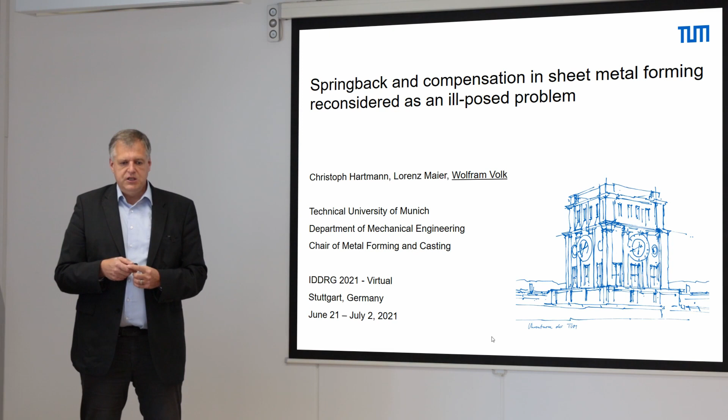When we have a look at Springback, we know it's a big issue. Most dimensional problems caused in sheet metal forming mainly depend on the Springback behavior, and there we have the stress distribution as the causing effect. We know we have contact forces, elastic plastic behavior, and after releasing the contact forces, we have the deformation of Springback. So we have many influencing factors.

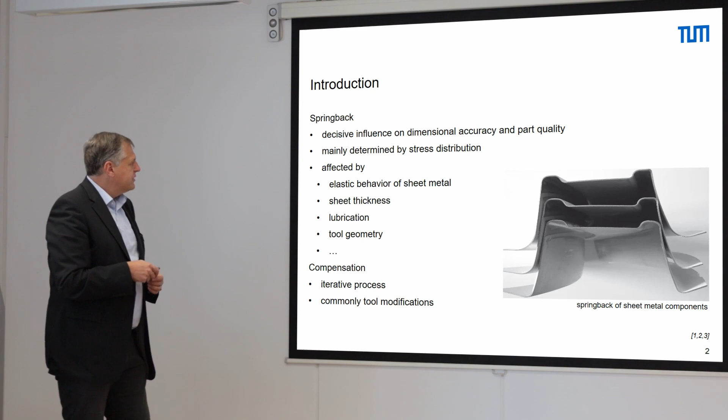It's definitely the elastic behavior of the sheet metal, especially for the unloading, and then the sheet thickness, lubrication, tool geometry, and many more.

Compensation nowadays is an accepted strategy to overcome these dimensional problems, and it's typically done in an engineering iterative process, ending in tool modifications.

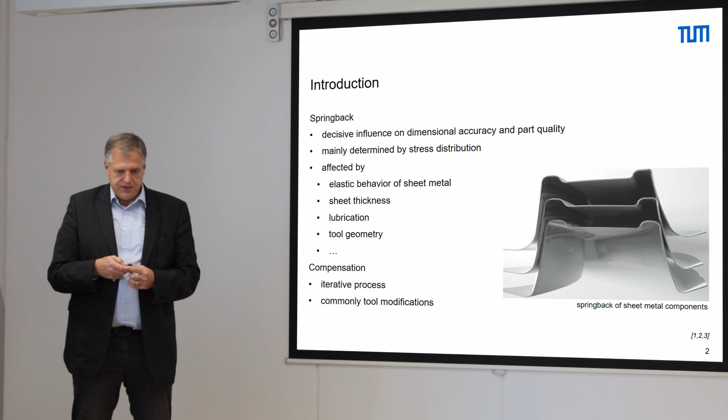Now when we see the classical approach, the question we have to answer is how to design a tool and process to achieve minimum deviations between the target and the component geometry after Springback, with respect to given process restrictions. So this task is written down, and typically we have 3 basic steps until we can come to these modifications.

First of all, we need the stress state after the forming process when we have closed tools. This is not a big thing in most simulation tools within a given accuracy.

Then the next step, also well established in our simulation packages, is to calculate the Springback when releasing the stress for closed tools.

Here we see a quite difficult example of a typical industrial part where we see typical deviations up to 7 millimeters in the corner areas. The Springback is in the direction where we don't want to go within our tools. Of course, our tool must go in the opposite direction, and therefore we need measurement and a compensation strategy.

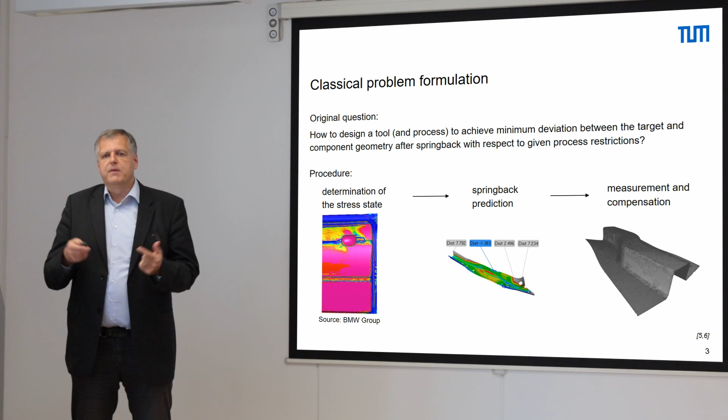So here we transfer this strategy from the last slide into a mathematical description, where we see the desired tool and die geometry. Then we have the measured geometry G, depending on the tool geometry and process parameters, and we have the CAD geometry or target geometry. So here we can measure a deviation between the desired and the current geometry.

In addition, like in nonlinear optimization, we can use restrictions. These restrictions can be inequality or equality constraints, and a typical inequality constraint is undercut. Our tools must prevent undercut, because otherwise it would be impossible to form it.

So undercut would be part of these inequality constraints, and also sometimes we have limitations within our tool realization, like the punch opening line, which is given, or that it's not allowed to change the blank holder geometry. These can also be defined as equality constraints. So this is our mathematical representation of this classical engineering approach.

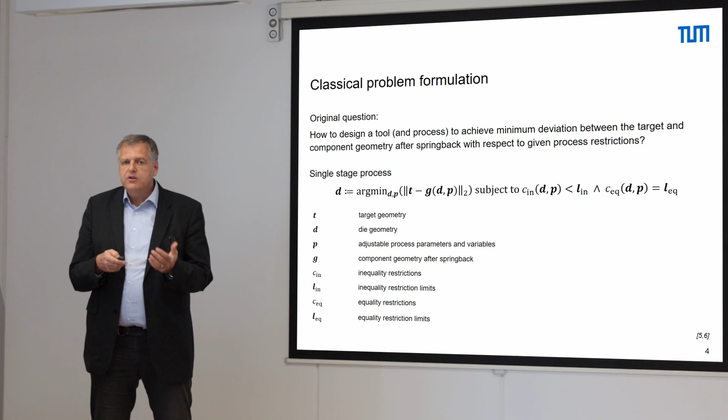Here we only have one forming operation. When we have a look at industrial applications, we not only have one stage. As you can see here, we have for most automotive applications multi-stage processes.

So where we have the first forming operation, we have cutting, restrike, calibration, and so on. Here we also have an important forming content in the first one, but also in the other stages, where we can have forming parts and therefore also Springback.

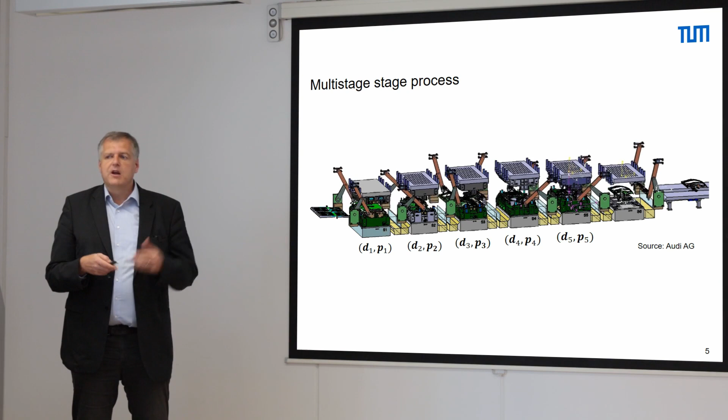And now the question: how to formulate these real processes, multi-stage, in the same mathematical framework as presented one slide before. When we go on here, we say, okay, we can enhance our formulation.

What's our customers asking for? Our customers are asking for a final part within the given tolerance. That means when n is the maximum number, we have to minimize the deviation in the last forming stage. But we don't know how to do it, because the other forming operations are also influencing the final result. So here it's just the mathematical representation.

Okay, the final part must be within the tolerance, and we can have inequality and equality constraints for every stage.

Okay, so here it's written down easily, but how to overcome this problem? We want to highlight this with our example. That means even when we start here, this is our target function, and here we have the influencing geometries of all the intermediate stages.

When I had my industrial time before academics, we also had many discussions how to do this. At this time I said, what would be the case when we demand that the deviations in every stage should be minimized? Then we have not the full degrees of freedom, so we have additional constraints based on experience that we say, okay, when the deviations are not too big, we have the option to minimize them within a suitable time.

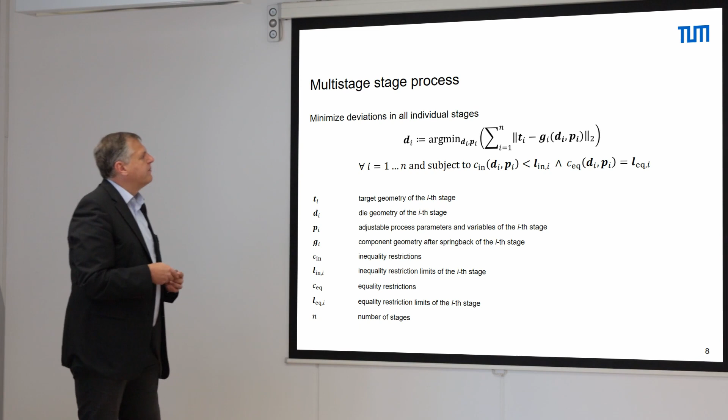This can also be written down in a mathematical framework, that we minimize the deviation in all individual stages. We have the sum of all the deviations, and they are not independent from each other. We have to start with the first one, and the second one is depending on the first, and they go ahead within our different stages. That means we minimize the first one, the result of that is the incoming geometry of the second one, minimize this, then minimize the third, the fourth, and finally the fifth one.

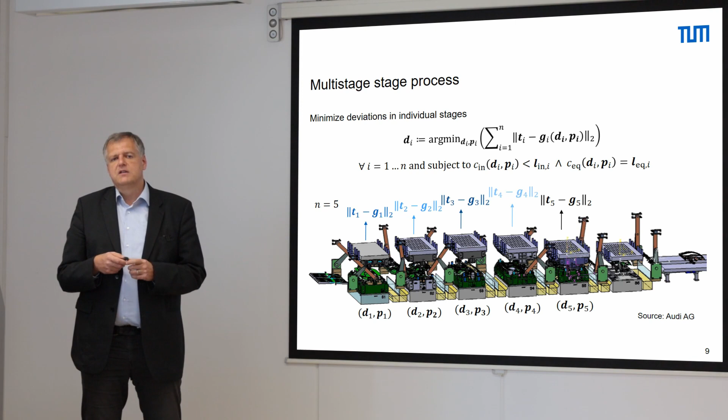So this is also a suitable strategy, but it's implicitly part of when we just minimize the final one, but we have the demand of more constraints within the prior geometries. That means at the end, typically with this strategy, we are maximum as good as when we just do it in the last one, but because we are losing some degrees of freedom, in general we will be not as good as when not having these constraints. We will see this also later in the short example.

Okay, now we can say, let's go on. We have a description, we can go for a solution because now it's a mathematical equation. Then we can have a look in math books, find strategies how to solve it. But then normally the prerequisite of a well-posed problem occurs. That means, okay, perhaps it can work, or perhaps it cannot work. Therefore, we should consider first the structure and the basic limits of our formulation. What's part of the so-called well-posed problem?

When we have a well-posed problem, we go back to Hadamard's work. We should, or we must, ensure a priori that the solution exists. Also, the solution must be unique and it must be robust. That means, in the mathematical description, the behavior of the solution changes continuously with the initial boundary values. In engineering words, small changes in the incoming variables should also lead to small changes in the output result and not a chaotic behavior.

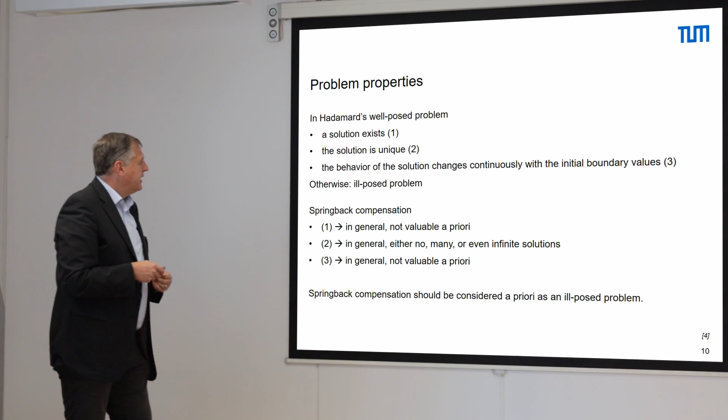Also, especially for the multi-stage problem, there can be different ways for the same geometry, so the solution of tool geometry where we're looking for is not unique. And finally, also the robustness is not always fulfilled. So from this point of view, our problem is in many cases ill-posed, and so it's not a wonder that sometimes an established solution strategy, which comes to a result for one example, fails for another one.

Okay, so let's transfer this problem to sports. When we are a manager of a football team and we know we have an ill player, what can we do? First, we can send him onto the field, hope that the illness is not too bad and we will have success also with the ill player. But on the other hand, we have the option to give him medicine, so that he will recover and then have full strength afterwards.

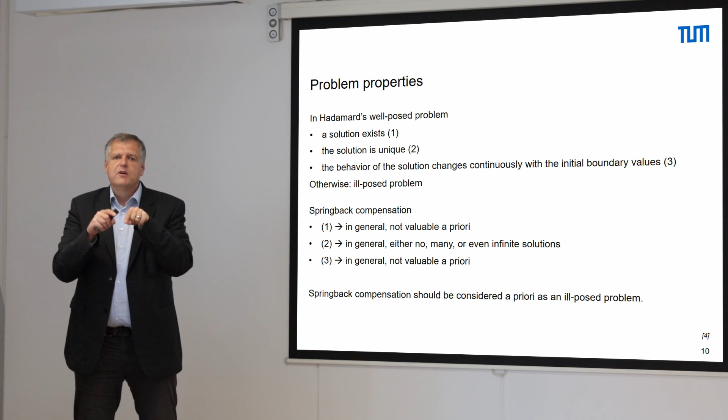The same idea can be applied in the mathematical framework of ill-posed problems. There we can go back to Thikonov's framework, that regularization is a really powerful medicine for problems which are ill-posed. So what we do, from the basic idea, is take our classical problem and add, based on experience, based on the type of problem, an additional term where we can increase robustness and transfer this ill-posed problem to a well-posed problem.

So it's a little bit like voodoo, you could say, but yes, it is, let's say, based on experience. But if you put in enough experience, you see that with the mathematical knowledge and the experience, you can come to really good results.

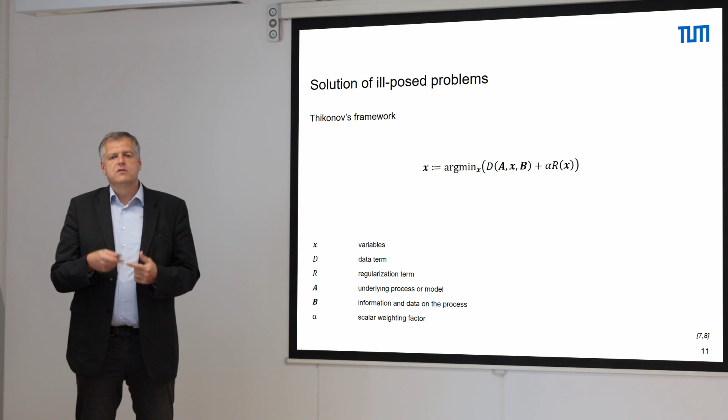So this alpha, also called in literature a hyperparameter, based on the structure of the problem and experience, can help us change the mathematical description and come at the end to a robust solution, because we have transferred our ill-posed problem to a well-posed problem.

So when you write it down, please don't be confused. Here we have our classical data term, introduced some slides before, and our regularization term. The regularization term depends on our die geometry and the process parameters. We have added the joker vector phi, where we can put in experience, how to use it, how to set the hyperparameters, because this really helps us come to better solutions.

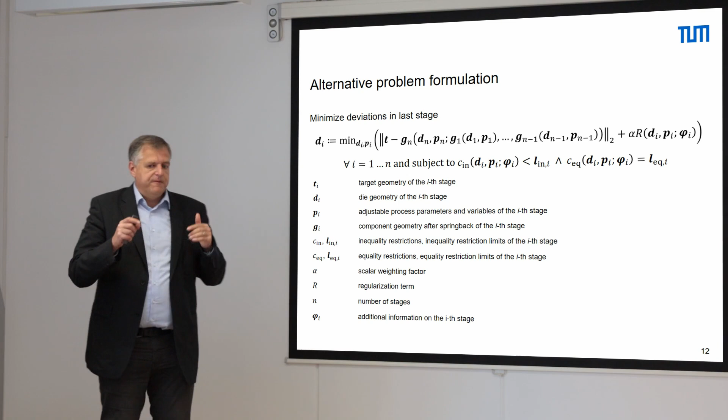So we have a small modification of our problem, and when we take a small look at the type, we can also find the basic components of the classical engineering strategy in this description.

Here we see the geometry, where we have the stress state, the springback, the elastic behavior, elastic modulus, and so on. Also we have the norm, where we see the difference between the target geometry and the real geometry—this is the measurement part of the description. Finally, with the regularization term and the minimization, we have the compensation. So all three elements you will find back in this mathematical description.

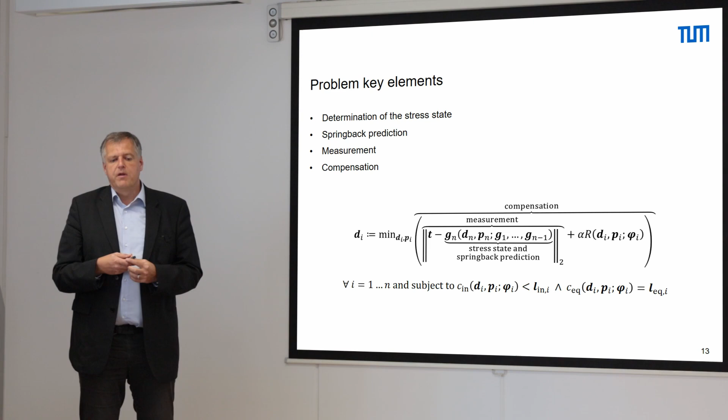So now we can go on. Let's come a little bit to industrial applications. First, the determination of the stress state.

We all know it's state of the art, but we should do it in an accurate way, because if you have a wrong prediction of the stress state, you will have a wrong springback prediction. So the die geometry, process parameters, variables, material parameters, material cards, and so on are really important and should be done carefully. Then, sometimes underestimated is the springback prediction.

Why is it sometimes underestimated? Because we know that the elastic behavior during unloading is sometimes changing, or in many cases changing, with the degree of deformation. That means our elastic modulus is significantly lower than our initial loading modulus. We have many works and real examples for real materials showing a decrease of 10% in the unloading modulus compared to the loading one. And if you sum it up, you see that it's really important to take care of it.

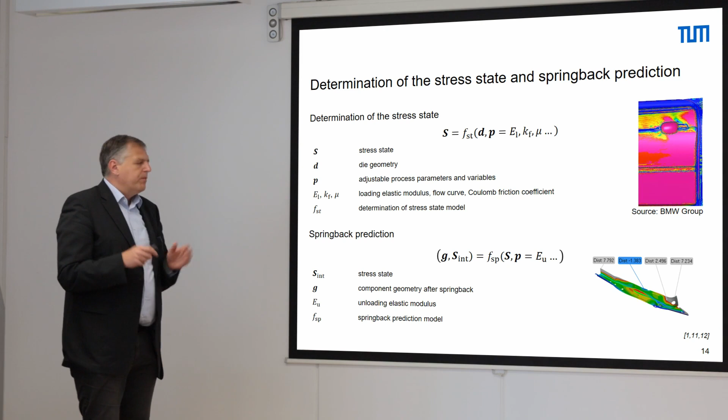Also, what I want to mention: for a typical forming operation, the stress state in elastic plasticity, in the end, is so-called incompatible. That means, due to the plasticity, even after unloading, we have a remaining residual stress state in our component. So due to these incompatible modes of plasticity, not the full set of stress after forming causes springback, and especially for bending operations and so on, we have a significant amount of residual stresses in our final part. Here you see a typical way of springback, but it's not the main focus of the presentation today.

Then, also absolutely not trivial is the measurement. In a simulation it's quite easy, because we always have the same coordinates and we know the material points before and after. When we compare real formed parts with the CAD geometry, it's much more difficult, because it's not obvious in the first step which material point had contact with the tool when you just measure the part after springback.

And now the final topic within the framework, which is causing us problems, is the robustness of the solution. We heard we have in many cases an ill-posed problem, and there the effect of stochastic deviations occurs. That means the difference between target geometry and real geometry has a stochastic part and a so-called deterministic part.

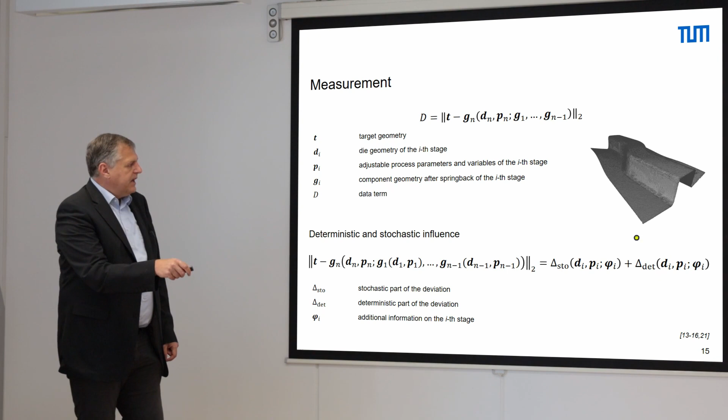This stochastic part can be caused by deviations of the material, changes in lubrication amount, and so on. From the mathematical point of view, it's a high frequency deviation, and the deterministic one is a low frequency deviation. Here we also added this vector phi, because if you've just formed one part, you need some experience how to differentiate between the amount of stochastic and deterministic deviations.

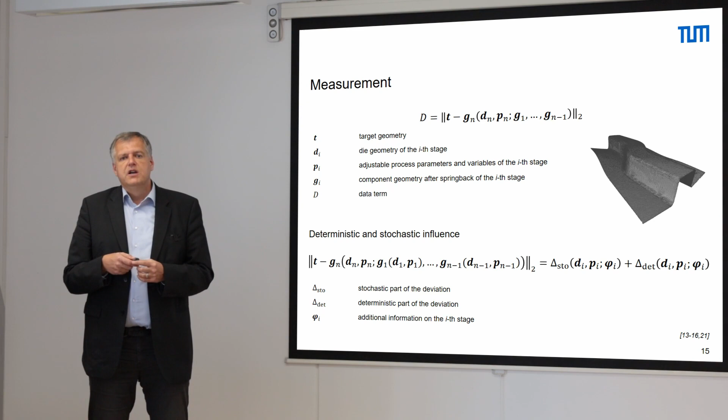Also a big topic, because typically for the compensation we only want to compensate the deterministic part, because we want to have an accurate part for all allowed deviations within our process. And when we have only small data, when we have only the first few produced parts, this is really a hard topic, and we need strategies to overcome this, which we will present soon.

Okay, so the updating rule for nonlinear optimization: in the classical way we have just our data term, and in the alternative way we have the regularization. So here are some published procedures and strategies that exist, which I want to discuss briefly.

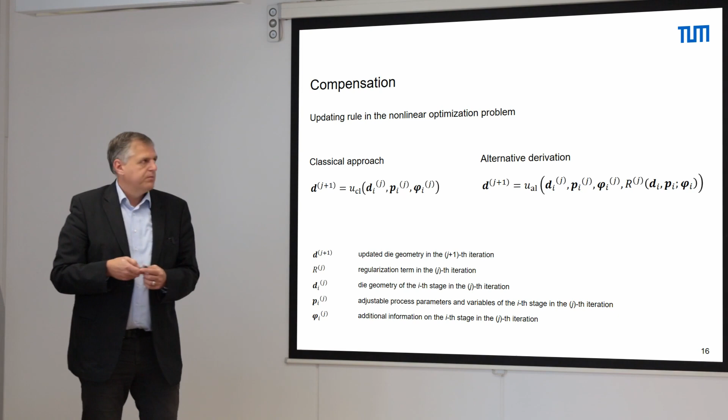The most applied procedure, available in many commercial packages, is the so-called displacement adjustment method. What we do: we calculate the difference between the target geometry and our first produced part, and then we update the geometry by just the negative value of the deviations.

With the displacement adjustment method, we only have a displacement vector, and with this displacement vector we have the option, especially for tension and compression, to come to a good result.

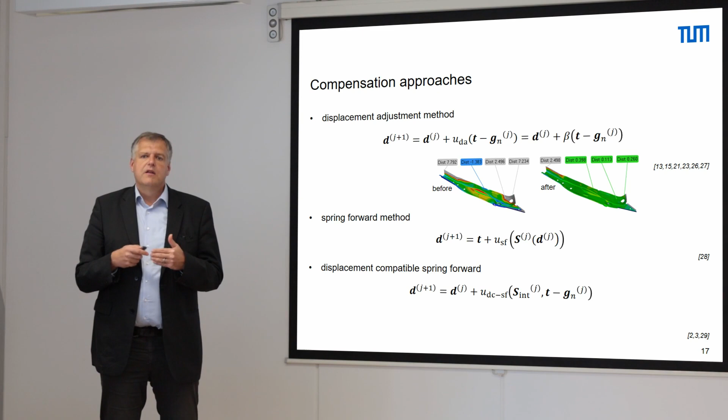What we want to highlight are the options of the regularization and the well-posed transfer after having the regularization term.

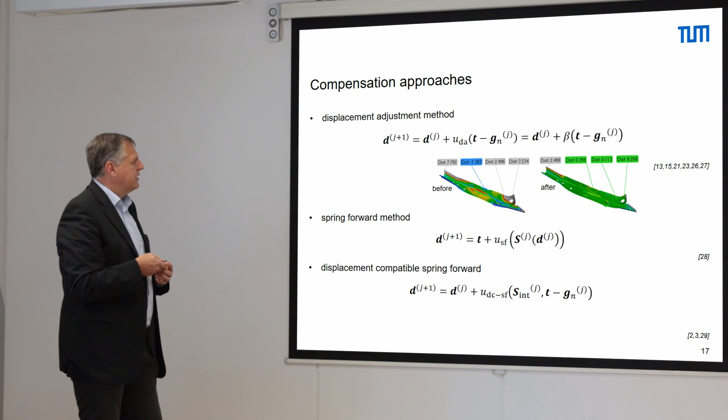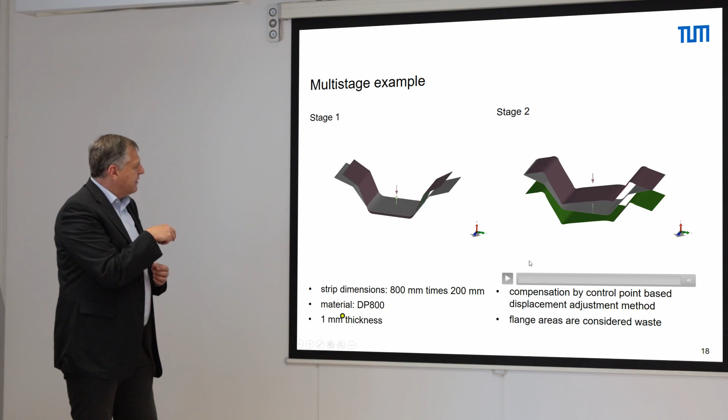Here we have a two-stage forming process of a simple geometry, where we see the first drawing step, for material DP800, thickness 1 millimeter, and a second forming operation.

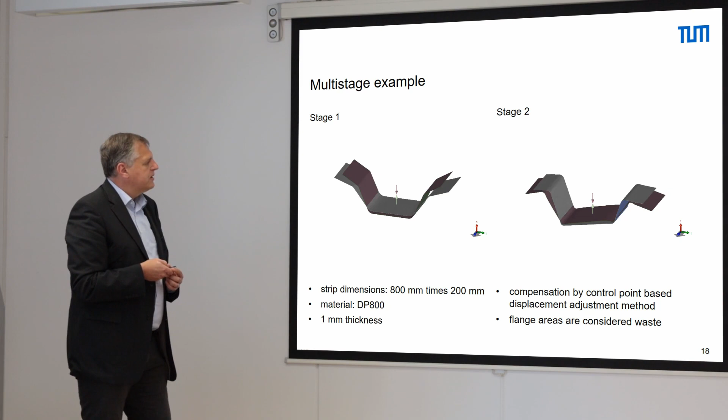The compensation here is done by the control point displacement adjustment method, and we also assume that the flange areas are considered as waste and are not added into our target geometry, where we want to have suitable accuracy after springback.

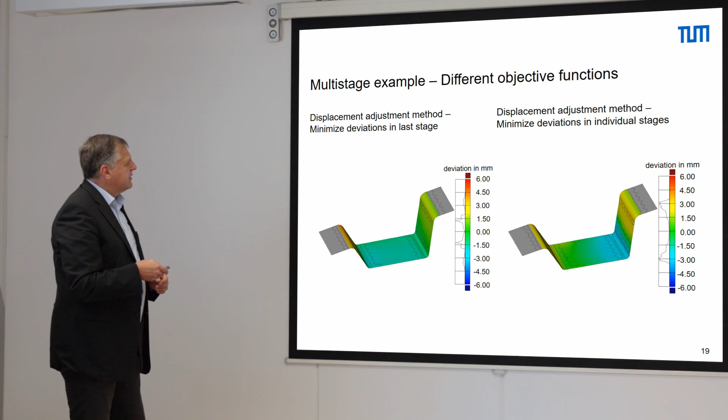So I go back so you see also in this histogram the amount of elements within it here, standard plus and minus 10%. Also in individual stages we see that we have big deviations, so we focus in the following only on the left side, where we minimize the deviations only in the second forming step.

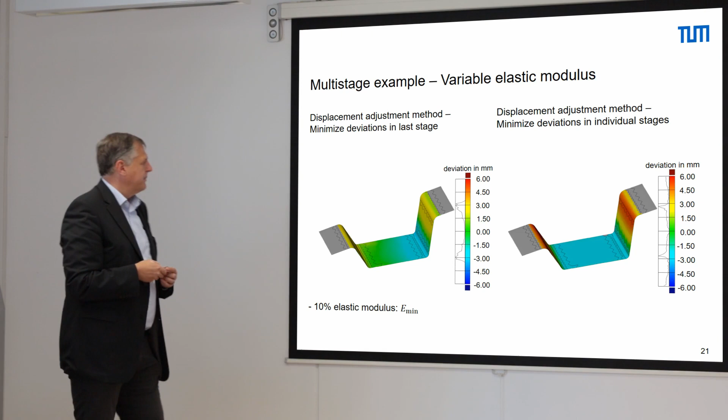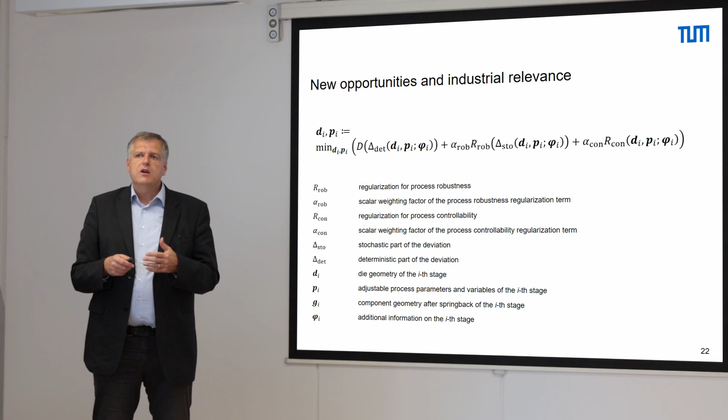Then we can reformulate our basic mathematical approach, and also show a possible way of using it, where we can differentiate the robust approach based on stochastic deviations, and sometimes it can be helpful to add one more control. So for this controllability part of the regularization technique, it is really a big chance, because now we have a mathematical formulation where we can directly integrate sensor information within the optimization.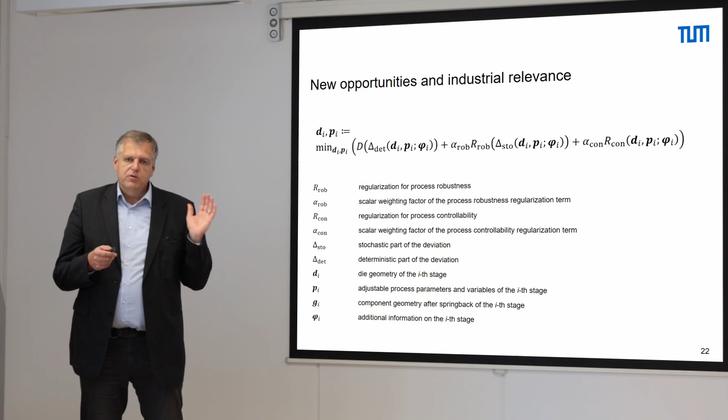So this is also a new part of our own paper, but we want to highlight here that we have the chance within this given description.

Okay, so now we want to see how we can come to a solution in this simple example with this variation of the Young's modulus, which we can say is a stochastic deviation.

So here we have the conventional approach where we just add the beta, and on the other hand we can say we have the regularization term based on the stochastic deviation, also using the displacement adjustment method, but we have the deterministic part calculated in that way. So we want to do, in this step, based on the information on how material parameters can vary, a compensation with a best fit which is applicable for all of the possible deviations, plus 10% and minus 10%.

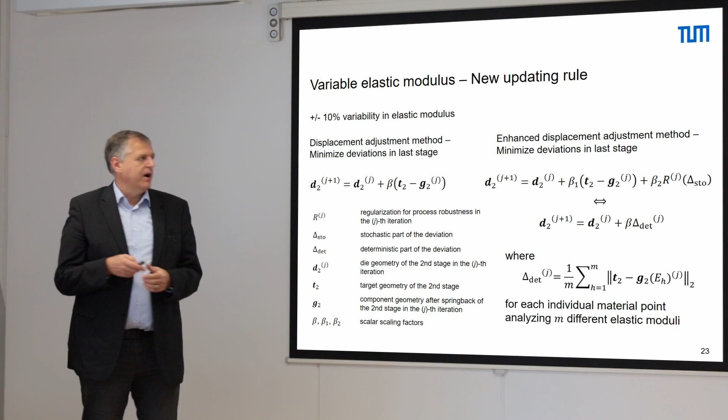So here we see that without big effort, just with the reformulation of the problem, we were able to take care of these stochastic deviations and to have a more robust optimization of our tool geometry.

And this is what we recommend to do, also to reconsider as a big take-home message of the presentation, that even with a little bit of mathematical effort, we are nowadays able to take care of these stochastic deviations and to have a higher robustness in springback compensation.

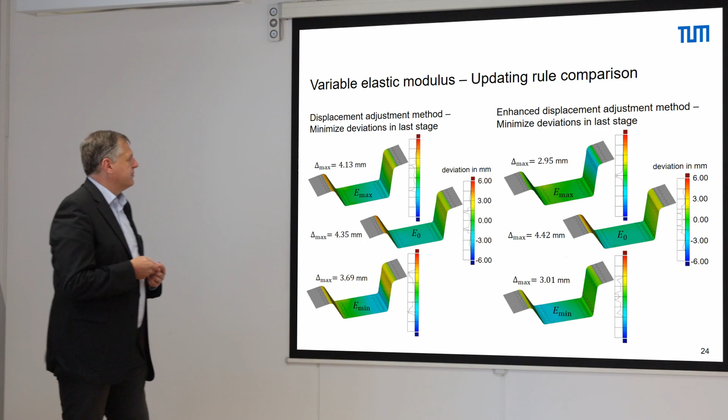So let's come to conclusions. What I really want to give you as a key aspect of the presentation: please be aware that springback compensation in many cases is an ill-posed problem. And don't be too surprised when you see that conventional solution strategies occur oscillations or don't come to a result.

The framework we opened here also gives us the possibility to take care of a multi-stage formulation of the problem, that we are able to change the objective functions, and also how we can include robustness and options of controllability within the whole framework, making it possible to take care of industrial applications as well.

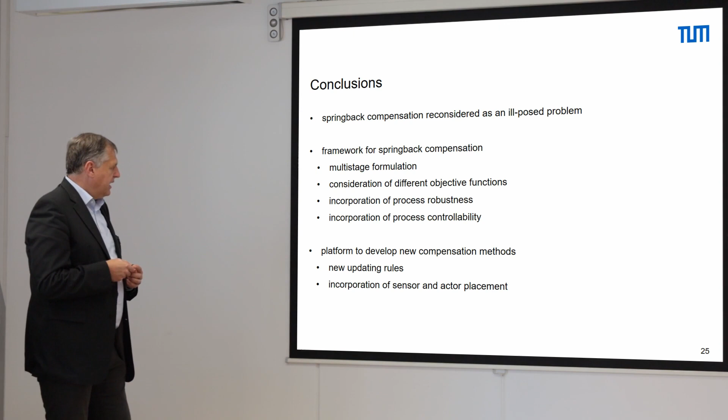And at the end we have compensation methods where we have updating rules, and we are able to put in sensors, but also a big field of research where you're always welcome to discuss with us, how to do it, how to have the best position of sensors, how to take care of controllability and robustness and so on.